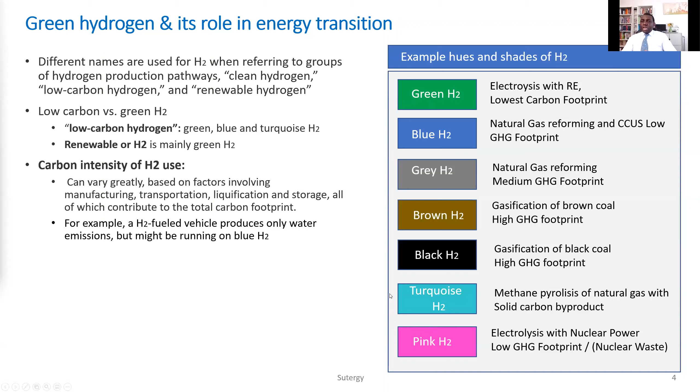And then obviously you have things like brown hydrogen from coal, black hydrogen from coal, turquoise hydrogen from pyrolysis of natural gas, which produces solid carbon, and then pink hydrogen, which is often discussed in countries with nuclear power as an alternative to green hydrogen - because the European Union, for example, has declared nuclear energy partly green, so the nomenclature depends on which continent you're in. So we may see more pink hydrogen being discussed in future, but for Nigeria, green and blue hydrogen will tend to be the core focus.

Now, one of the challenges in moving hydrogen into the mainstream in most economies is the cost factor and cost parity - how do we ensure that hydrogen per kilogram gets to a price which makes it competitive with other fossil fuels? So globally, going from the IEA Global Hydrogen Review from 2021, the target is to get hydrogen below $2 per kilogram, which would make it a little more competitive as compared to other fuels.

Currently, prices are way too high, which is why you see a lot of initiatives, a lot of grants and funding going into the hydrogen sector - in billions - in Europe, the US, and Asia, because those countries see hydrogen as a major potential future fuel for them.

From the Nigerian perspective, this means: what do we do to promote the use of hydrogen within the Nigerian context, where we already have subsidies in place for diesel, and still for PMS, and how do we get people to move from off-grid production to such cleaner fuels, as well as move our transportation sector from those fossil fuels to more decarbonized sources.

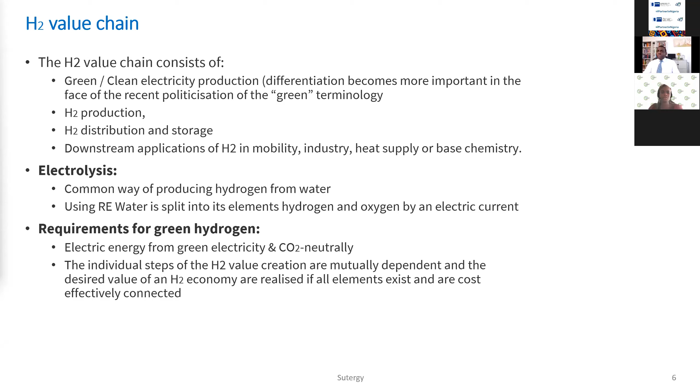That brings us to the current situation in Nigeria with regards to renewable energy production. Whilst most people talking about renewable energy in Nigeria focus on solar power, we also need to look at other sources already in place, such as hydropower through our dams and future small and medium-sized hydro production sites, which will give us an opportunity to partly decentralize hydrogen away from the major electricity grid, which has inherent challenges in Nigeria right now.

In the aviation sector, we'll be talking about e-fuels, production of clean fuels, or in some cases e-kerosene, as some would say. There's also the opportunity for direct use of hydrogen through fuel cells in transportation, through H2 mobility.

So as you can see, a very broad spectrum of use cases, which will basically enable a transformation of the Nigerian economy towards a much more decarbonized economy, and then put us in a position for global competition.

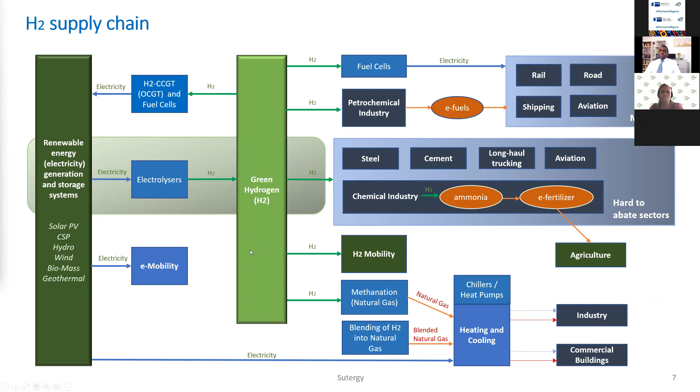The LNG supply to the clients was basically such that the carbon produced during its production process was offset through other climate projects. So this will become a competitive factor moving on.

Nigeria's hydrogen potentials, presented in brief. There was a project presented in one of the AHK webinars, the H2 Atlas Africa project, run by the German government and implemented by the Julich Research Institute in Germany. My dear friend Solomon Agbo, a Nigerian who was the project manager of that project, presented it in one of the former webinars.

The key result is that the West African region, including Nigeria, has high potential for green hydrogen production, meaning from renewable energies. Parallel to that, due to its huge gas reserves, Nigeria also has the potential for production of blue hydrogen and turquoise hydrogen, as the case may be. This in itself is a very strong advantage for a country currently struggling with its energy supply.

I will present later the opportunities in decentralized electricity generation in Nigeria, which will enable us to move hydrogen away from the grid, because most countries currently view hydrogen from the perspective of using their existing pipelines to supply their major industrial areas. But Nigeria could actually start from an off-grid perspective, whilst our pipelines and electricity grid are built up under the declared decade of natural gas by the Nigerian president. But I'll come to that later on.

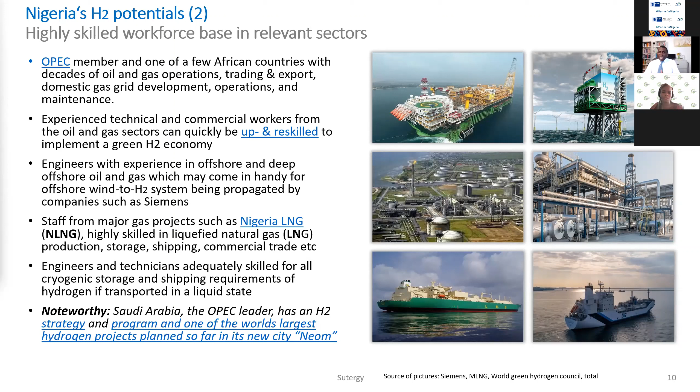The first LNG ship, shown in the lowest picture on the right of this slide, recently transported liquefied hydrogen from Australia to Japan as a test of the hydrogen value chain between those two countries. This shows that the skills we already have in liquefied natural gas could easily be applied to that aspect of global trade and energy export. Nigeria is one of a few African countries, besides Equatorial Guinea, Angola, Algeria and Egypt, that actually has a trained and experienced workforce in place.

One other aspect spoken about globally is the blending of hydrogen into existing natural gas pipelines. There are possibilities to do this up to between 2 to 10 volume percentages of green hydrogen blended into existing networks, based on existing research and pilot tests done in various countries around the world.

Looking into the future, people believe up to 20 volume percentages of hydrogen could be blended into networks. We're now talking about networks in Nigeria operated by companies like Axxela, the Nigerian gas company, Shell Energy, and the likes.

What we need to do to get this blending in place is create the standards and carry out pilot tests to make sure that hydrogen, which has an embrittlement effect on steel, on normal pipeline steel, will not affect the components within the gas networks we are trying to blend hydrogen into.

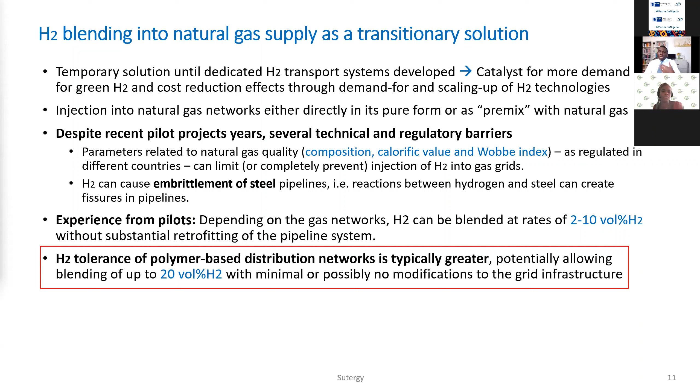This will open up the use of more hydrogen within the Nigerian economy. So, from a national strategic intent, let me round up here.

Rounding up, the key thing to keep in mind is to focus on mid to long-term domestication of the hydrogen value chain in Nigeria. By value chain, I also mean production of the components inherent within that chain: renewable energy technology like solar PV, hydro, electrolyzers used to produce hydrogen, hydrogen-ready pipelines, hydrogen storage, fuel cells used to produce electricity from hydrogen, the whole hydrogen mobility sector, and the huge opportunity in hydrogen bunkering for ships in our ports through the Nigerian Ports Authority, and use in airports and planes.

It's a future outlook, so the government needs to draw policies that allow this sector to grow. I will try to do a further dive into these various use cases, hopefully with you in a future webinar at some point.

As you can see, there are lots of points and still lots of slides to go. I'll provide the slides to you so you can look into them at your own leisure. If you have questions, please kindly send those to me. Thank you for having me, and I look forward to your questions.

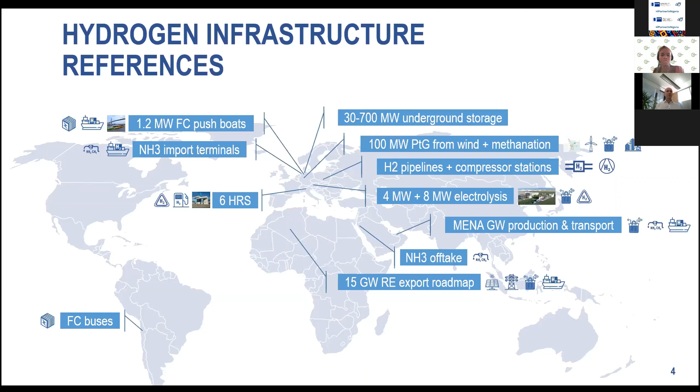It's an extremely flexible carrier of energy, of course. It can be produced, separated, used in many areas, compressed, liquefied, connected with liquid organic carriers. There is the ammonia topic, which is huge. There are e-fuels, a power topic, usage of hydrogen in the mobility sector, in trucks, trains, ships. Ammonia can also be used for very heavy industry, propelling machinery and vessels.

So we see that really this is what we enjoy as an engineering company, to work with these puzzles, so to speak, and go into many uses and ways to use and produce hydrogen. This relates very much to decentralized systems, where you can produce and use hydrogen independent of the major grid or gas pipelines. You can build that in a decentralized way. I think this would be particularly important for Africa, much more than for example Europe, where you have much more dense industrial networks. Maybe Africa is really the place where this will be the main driver of hydrogen expansion.

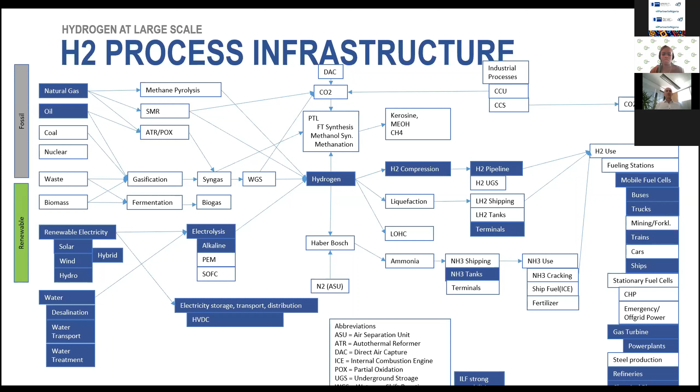This is the integration part, from my perspective, but it relates very much to all of the companies I would say: upstream, solar, wind, hydropower, desalination, water treatment, transmission. Then you have power transmission, energy storage, hydrogen production, using pipelines underground. This is very much repeating, but maybe organizing it in the way that my company operates.

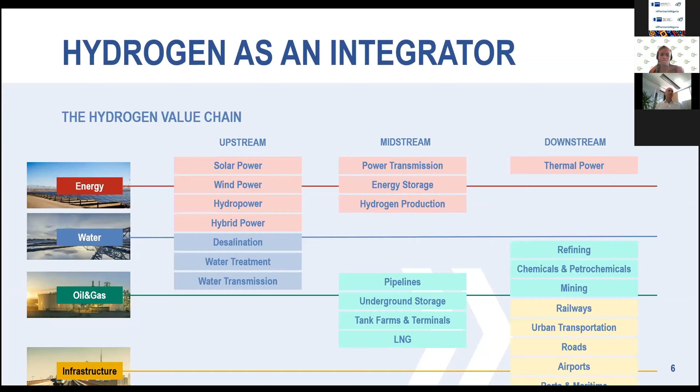Green versus blue, it was already mentioned. I do believe in Nigeria you have actually both opportunities, huge ones. You have a very robust and large-size fossil fuel production system, especially on the gas side. You have extremely big LNG terminals that are being expanded now, with many trains — I believe train number 7 is currently being designed and built. You have IOCs, international oil corporations, which have been present with this expertise for a long time. So blue hydrogen, I believe, is also a big opportunity for developers to look at.

We have been talking with some of them already, which I cannot share the names of here, of course, but there is a lot of that. Green hydrogen, of course, with abundant sun and solar, also wind, also PV — could be near offshore PV, floating, or onshore. There are all sorts of opportunities for green hydrogen production, transport, and storage.

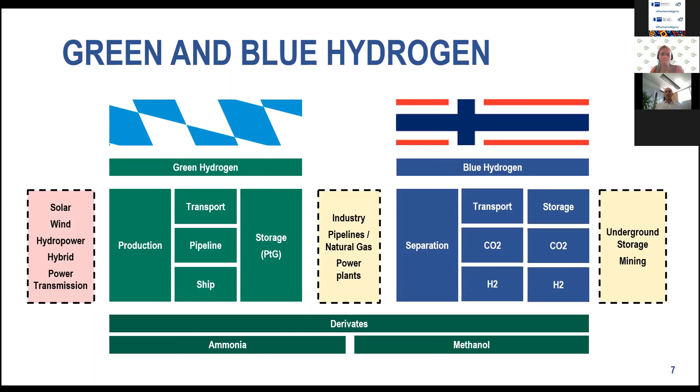And basically, derivatives mainly on the blue hydrogen side include methanol, which is a process you can use to receive that product. Then ammonia, as green ammonia, is a big topic. And of course, ammonia is huge in fertilizer and agriculture, which is one of the key and critical industries, and it will remain so in Nigeria and across Africa more or less. Ammonia can also be used for large power usage, and in heavy industry for propelling engines.

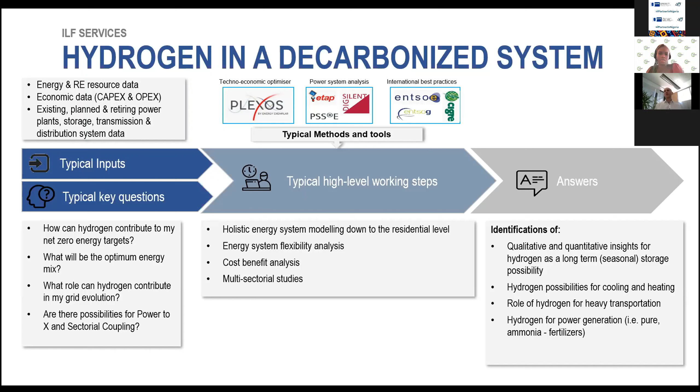This is very much what we are using in other projects around the world right now in terms of hydrogen. There are a lot of projects ILF has been doing, and there's no time to go through all of that, but whether it's hydrogen production or pipelines - the mixing in pipelines was mentioned, a very big topic, up to 20% - storage, refineries, land transportation, water transportation, usage of hydrogen, and so on. There's one case study I wanted to show, but let's leave it - this is Northern Europe, where there's actually quite an advanced feasibility study of a decentralized system using hydrogen as the main power source.

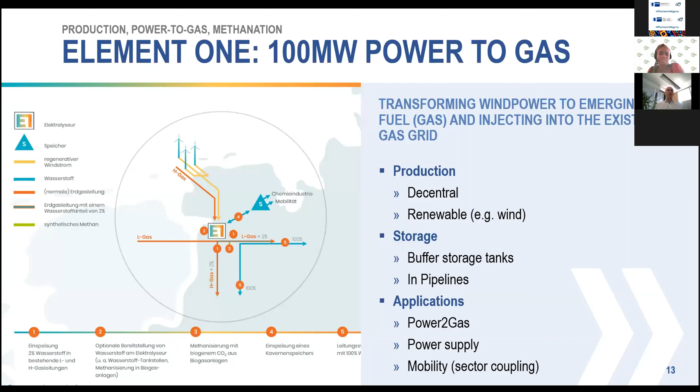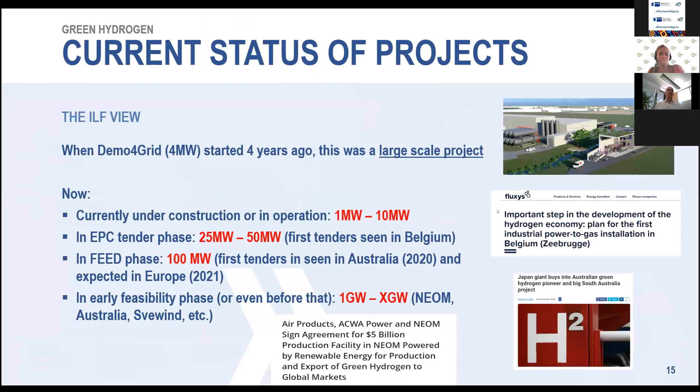So with that, the scaling up of hydrogen projects - this is certainly also something which is happening. It's up to a gigawatt scale right now. So with that, we see that Nigeria certainly has a big potential, and we are very keen to continue and expand our network in the country and talk with project developers, governments, IOCs and other funders and companies to apply the knowledge we've gained to help the country go forward.

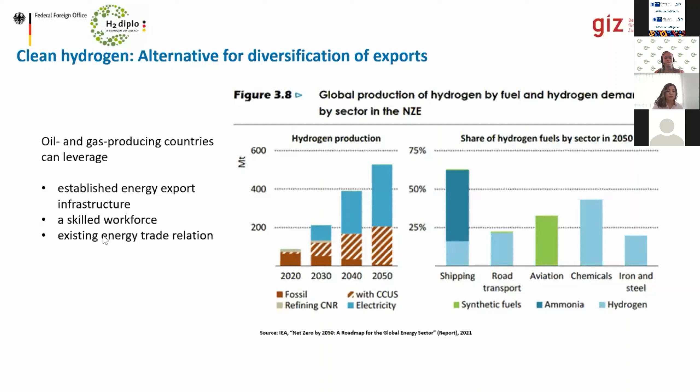So what can these countries do? Clean hydrogen offers an attractive transition pathway for oil and gas exporting countries to diversify their economies. Here we can see the blue part of the columns is green hydrogen, showing the increase till 2050 of green hydrogen production. So that looks like a promising alternative to replace some of the missing revenue from oil and gas exports. And oil and gas producing countries are well placed to pivot to hydrogen, as they can leverage established energy export infrastructure such as ports, pipelines, and storage facilities, a skilled workforce familiar with producing, converting, and handling energy fuels and gases, and already existing energy trade relations.

Another reason to move to hydrogen is that several fossil fuel exporters have themselves adopted a net zero goal—in the case of Nigeria, until 2060. So clean hydrogen is a vital avenue for achieving these goals. Some fossil fuel producing countries have already adopted national hydrogen strategies, for example Australia, Canada, Colombia, United Kingdom. And oil majors such as Shell, BP, Saudi Aramco, Exxon, and Repsol, as well as many smaller independent producers and engineering groups, have announced ambitious plans to build a green hydrogen business.

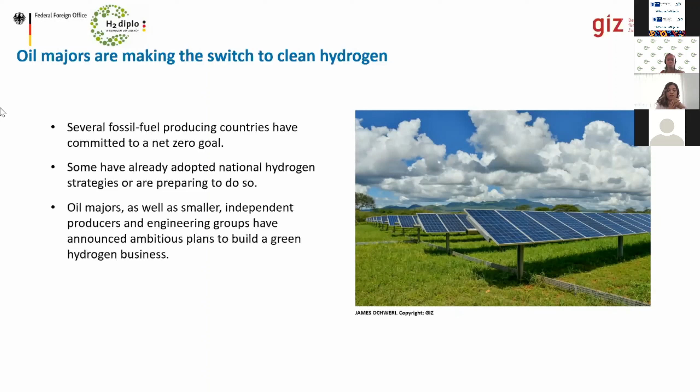It's important to note that even though currently oil and gas companies are benefiting from a post-pandemic return to economic growth, and also an increasing presence of intermittent renewables on the energy grid is currently favoring the consumption of natural gas, this is not likely to be a long-term situation. The renewable intermittency is increasingly balanced against battery storage, which keeps getting cheaper, and also with sector coupling measures. So these countries and these oil companies are leveraging already existing infrastructure and know-how to become strong hydrogen players and to position themselves at the head of the new hydrogen economy.

So where to start? If we think hydrogen is an interesting option, where could we start? Of course, there has to be some work on the regulatory frameworks, on certification topics, but I think that's something that has to be discussed in other fora. So I wanted to provide some pointers just for private sector discussions. As I said, each country's situation will be different, and this is just food for thought.

In the case of Nigeria, since we have this reluctance or concern regarding green hydrogen—because the grid is so insufficient and there is energy scarcity—how can we bring something that will compete with the energy supply to the population? A good option is the direct connection between a renewable energy system and an electrolyzer. That means building electrolyzers with their own dedicated renewable energy plants. That's a good way to start.

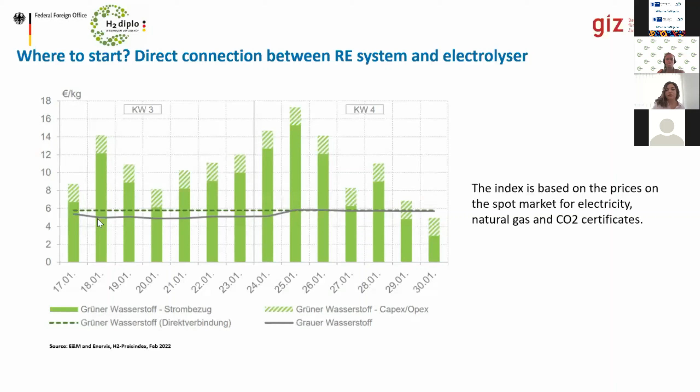I found this chart recently, which I found very interesting. Here the columns are green hydrogen—these are the index prices from Germany. The green columns are the green hydrogen produced with electricity from the grid, and the gray continuous line is the current gray hydrogen prices. What's interesting here is that the dotted line represents the prices of green hydrogen with direct connection to renewable energy systems. We see it's still higher than gray, but at least in the case of Germany—this is a very recent chart from this month—the prices are very close. By the way, these prices are cost-based, representing the involved costs in producing these hydrogen types. So this makes this option of building electrolyzers with power plants even more appealing.

And where to start in terms of market? Because with hydrogen, with green hydrogen in particular, we face the chicken and egg dilemma—there is still no big market in place and still no production. So how do we solve that? There is already a market for gray hydrogen, and a sort of low-hanging fruit for green hydrogen would be to start by replacing that. We think that industrial applications where hydrogen is already used should be prioritized, for instance refining and the production of ammonia and methanol.

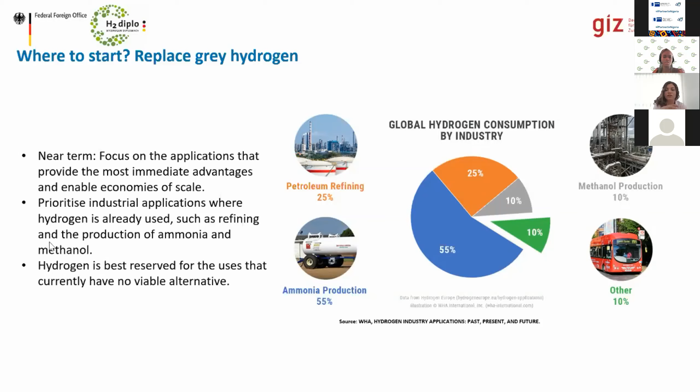And of course, hydrogen should be reserved for uses that currently have no viable alternatives. So, for instance, it's not a very good option for personal cars, because electric vehicles seem to be a better option there. So it's better to think of hydrogen for other uses. And for the future, as I said, this is just some food for thought.

If we look at 2050, higher income, economic growth and a larger population could cause marine freight to grow by more than 11 times current values. So even considering energy efficiency and potential reduction of ships' energy consumption, electricity demand for synthetic fuels could reach up to 500 terawatt hours per year. To put this into perspective, Africa's entire electricity demand in 2019 was about 700 terawatt hours. So there is a huge opportunity area there in which Nigeria could participate.